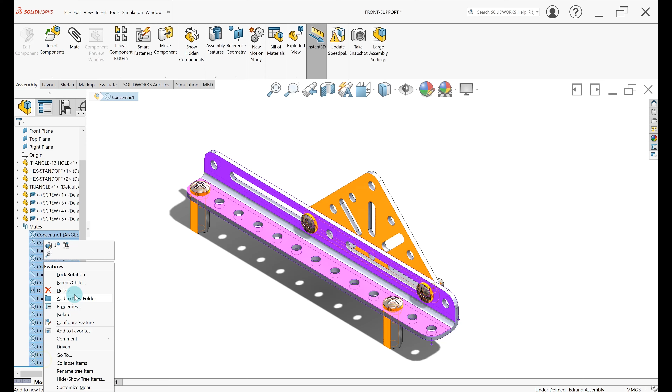The first thing I need to do is get rid of the mates I have. So I open up my mate tree. I can scroll through and delete them individually - see, I can see where that parallel is, etc. I'm just going to get rid of every single one of them: click the first one, hold down Shift, select the last one, right click, delete, and yes to all to get rid of all my mates.

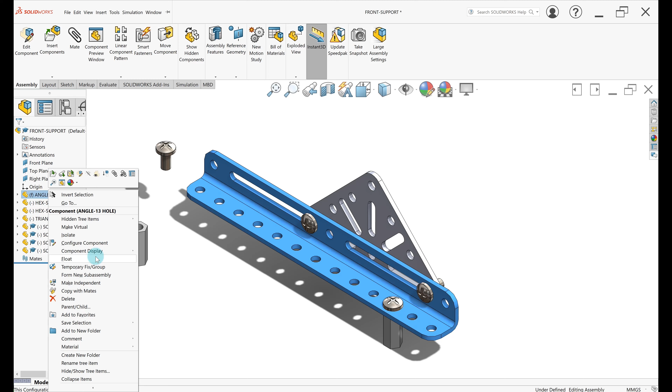Now I could grab any part and just move it around, except for this part right here. It's got the F right here next to it - that means fixed. You can make it not fixed by right-clicking it and coming down to float, which will let it move around. But you always need at least one fixed part in an assembly for all of the other parts to be defined.

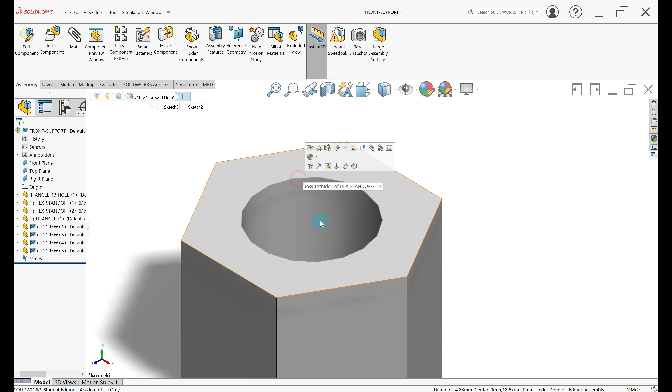So let's take a look at the hex standoff first. I'm going to attach this on the bottom side of this part, concentric with this hole. First, select the inside surface of the hex standoff. Don't be shy about zooming in so you can really see what you're doing - you don't want to select an edge, you want to select that inside surface. Zoom out, come over here, hit Control, and select that surface. Then go to the concentric mate, click, zoom out, and it will be concentric.

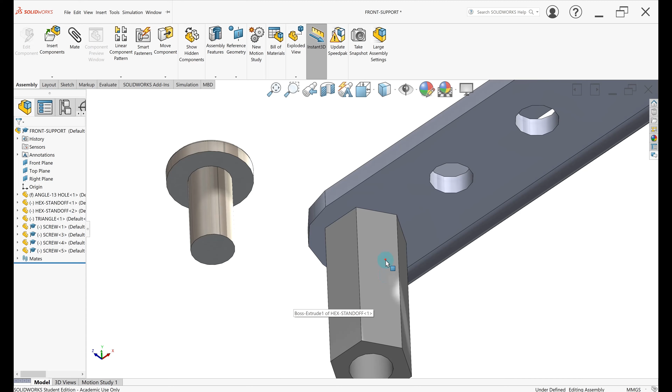Now I hold down the middle mouse wheel so I can pan over, and pull this part down. What I'm getting at here is you need to be able to zoom, pan, and scroll around an assembly to apply the mates - you can't just stay in one place and do everything. Get zoomed in so you can really see what you're doing. You don't want to be trying to select stuff out here. Remember, the F key will zoom you in, but the mouse wheel will get you in further.

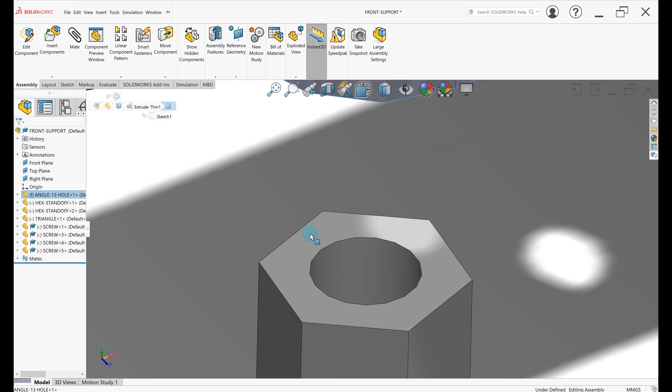So I've got this bottom surface here selected, hit Control, and select that surface. I want these two to be coincident, so it's going to slide right in there.

Now the last part, a new mate we're going to use, is called parallel. What we want to do is keep this hex part from spinning. One technique for doing that is selecting this surface and then this surface on the side of the part and choosing parallel. Click, it's going to straighten up, and now that part is fully defined - there's no minus mark next to it.

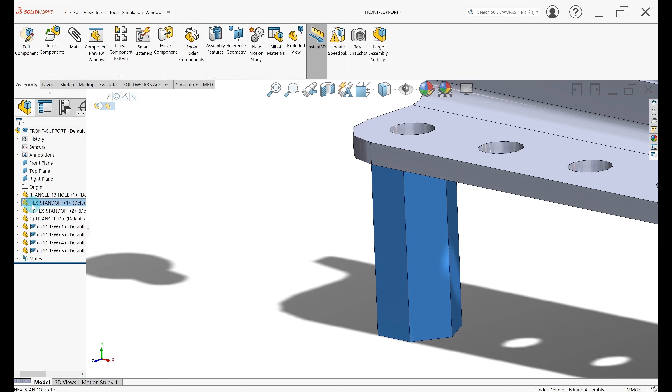Next, we'll attach the screw to that same location. Same exact idea: select this surface, then select this surface - coincident or concentric. Pan over so I can see the bottom, select this surface, hit Control, and select that surface.

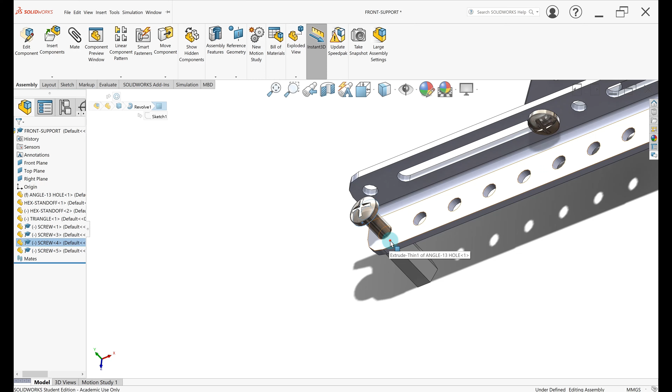Make it coincident. Now, if you wanted to keep the screw from rotating, you could select one of these flat surfaces, hold Control, select that other flat surface, and make it parallel. You could also make it perpendicular. It would end up doing the exact same thing.

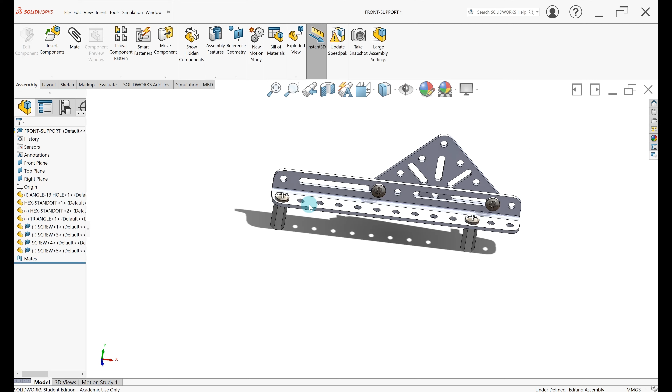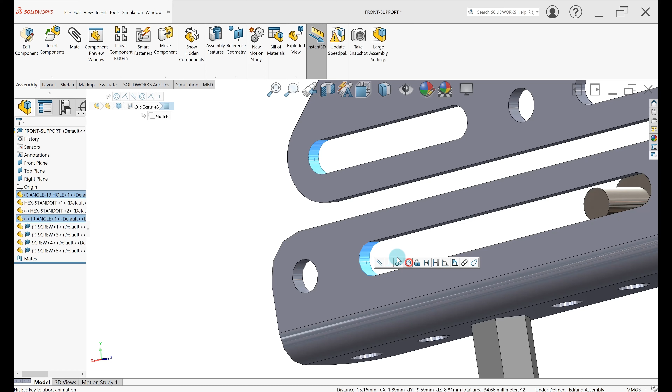Next, let's chat about this triangle. We want bolts to go through this slot, through each of these parts, and connect them. The way the book specifies to attach this triangle is to make this arc concentric with this arc. I select that surface, hit Control, select that surface, and make them concentric, because an arc is part of a circle, so it does have an axis. But I'll need something else because this is still free to spin around.

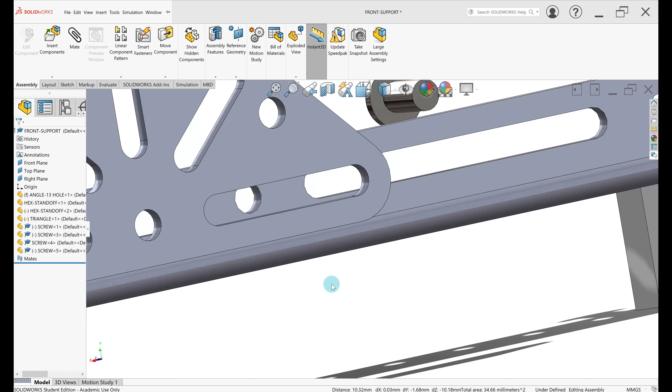So I'm just going to move this out of the way, select this, zoom in so I can see what I'm doing, hit Control, select this surface, make it concentric, and zoom back out. Now, the new mate we're going to use is called distance.

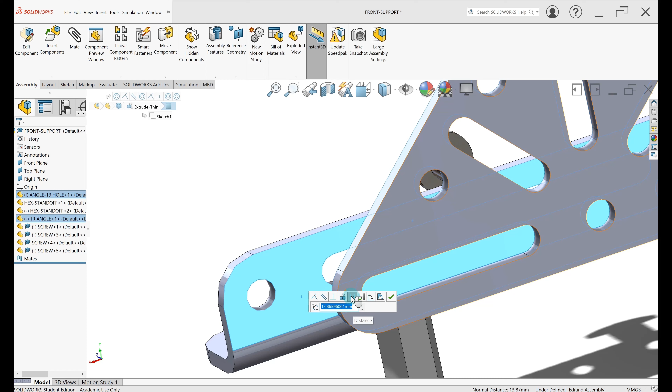So I need to lock this part in. The way I do it: select this surface, scroll over, Control select this surface. Normally we use coincident, but there are times when you want parts spaced out, and the way you can do that is right here with the distance mate. We're going to specify a distance that that triangle should stay away from the other part.

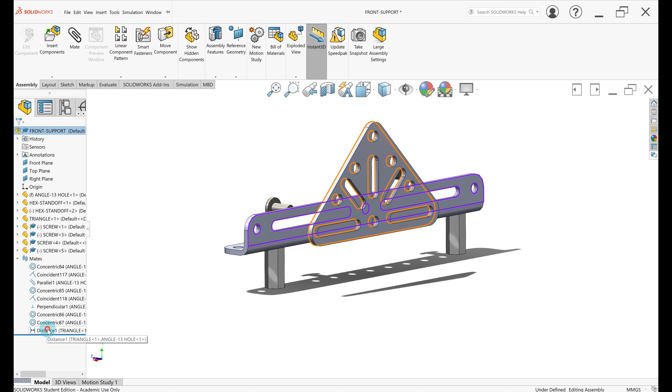Notice how the triangle is fully defined, but it's floating in space. We applied that distance mate, which is basically a coincident with a dimension attached to it. So we could go down here if we needed to adjust that distance mate, because the book specifies it should be 0 inches away. I'm going to edit that distance mate, and here is the distance right here. I'll enter in 0, and it'll slide right back in.

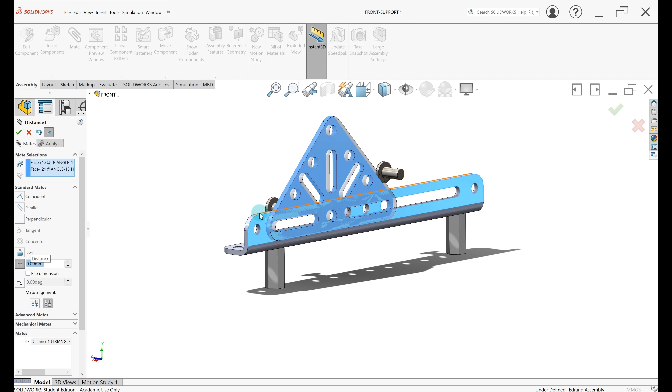What the distance mate allows you to do is have more control over your design intent if you think something is going to move at assembly. So I'm good with that mate. I'll exit that. The last thing I'll chat about are quick mates.

Quick mates are really handy when you're putting things like screws into an assembly. So I'm going to delete these two screws to get them out of the way so you can see what I'm doing here. I'll delete this one as well.

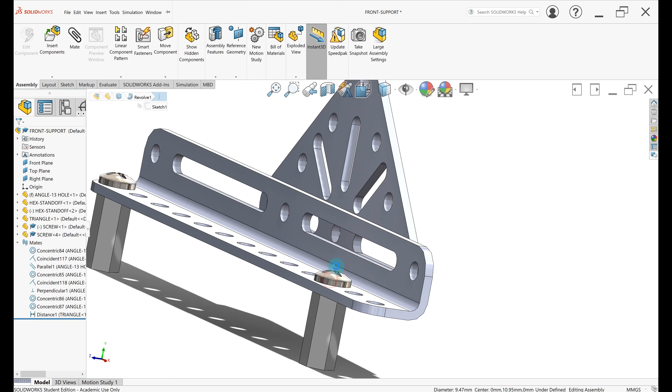Say we want to add these back into the assembly. I'm going to hit this button right here to move the tile over, and I'm going to open the screw part. Now I've got two windows going on at once. For quick mates, you have to have these two windows open, one for the part, one for the assembly.

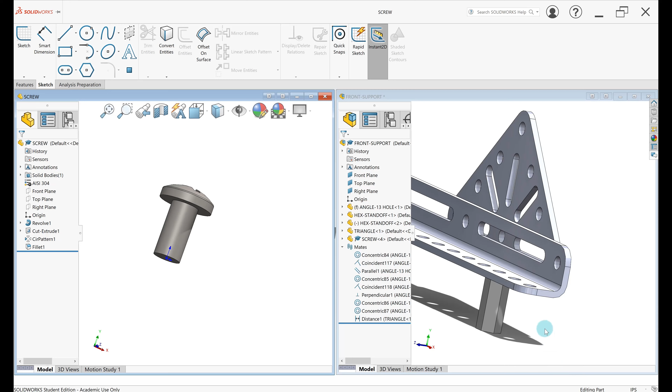So what I'll do is grab this edge of my screw, hold the mouse button down, and drag it into my assembly. If you notice, right next to my cursor is an icon — this indicates that it's going to give you a concentric and a coincident mate, which is what you'd typically use for a screw. So I let go of the mouse button, and it drops the part right on there.

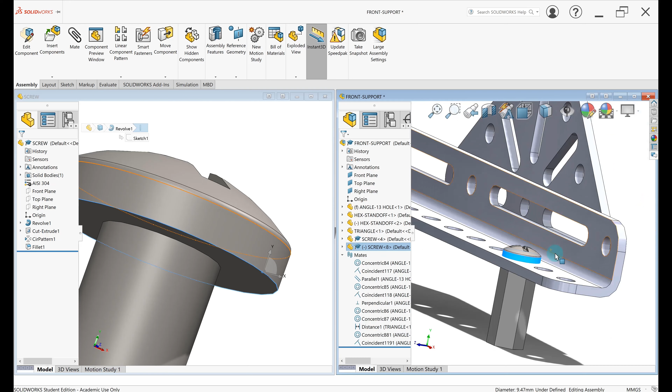So it's still free to spin, but it added that coincident and that concentric mate basically for free. It's a much quicker way to add screws into an assembly, so I can just rinse and repeat. If you needed to add ten of them, this is a much faster way to do it.